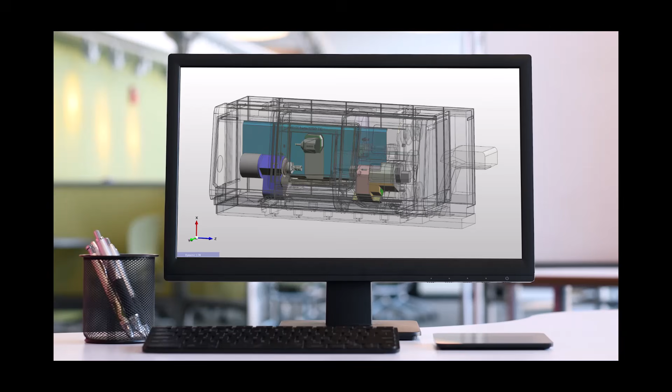We'll be looking at a part in a horizontal type multitasking machining center, and then we'll switch over to mills, where we start with a vertical machining center and then move to a horizontal type machining center.

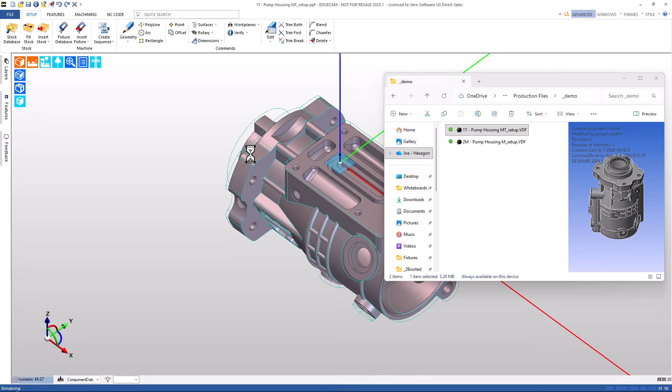So I'll begin by taking a fuel pump and bringing this into my Edgecam session. I'm going to change the environment to turning, and then I'm going to change the part orientation first by flipping it and then choosing the large flat to be our 0-degree position.

We're working with a casting. There's already been some work to turn the back side in a previous machining operation, and I'm going to go pick up from here and move to turning.

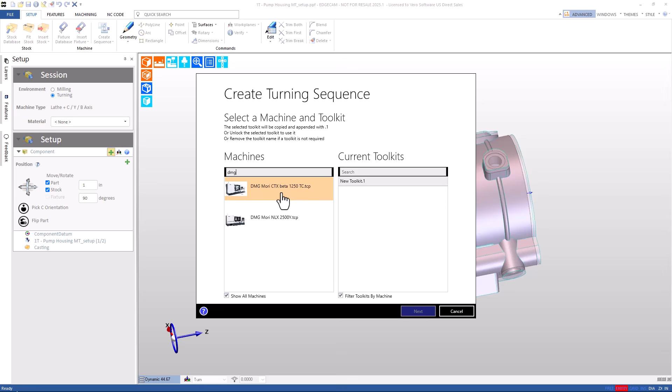So I'll choose my machine tool, my toolkit. We'll work on the main spindle. We'll put in our part stick out, select our initial datum, and then put the grip diameter for the jaws.

Very fast, very straightforward. Edgecam's created the machining setup, and this looks exactly like we intend for the shop floor. Great. We would be ready to move on to create toolpath.

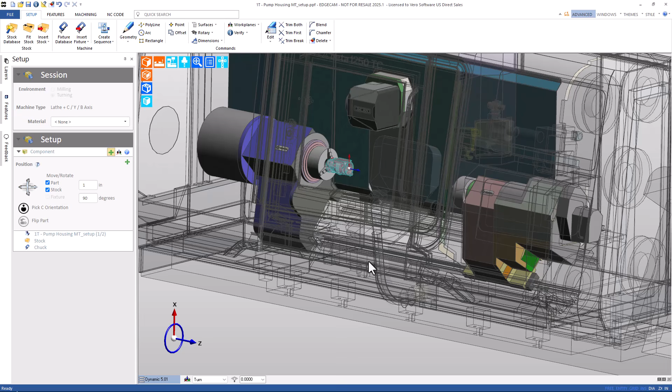Let's dump the file, and now we'll go look at a milling setup. So I'm going to use the same fuel pump, but now there's fixtures added to the solid for our milling setups.

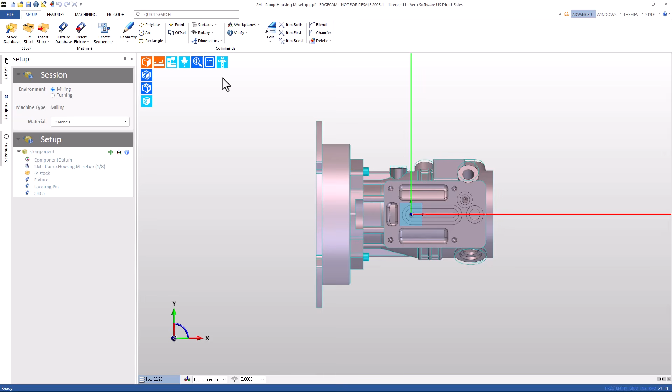We'll load this into the new Edgecam session, and when I look in through the top view, we can see that the part is not oriented the way it needs to be to begin the setup that we're going to do. No problem, we'll easily change the part orientation.

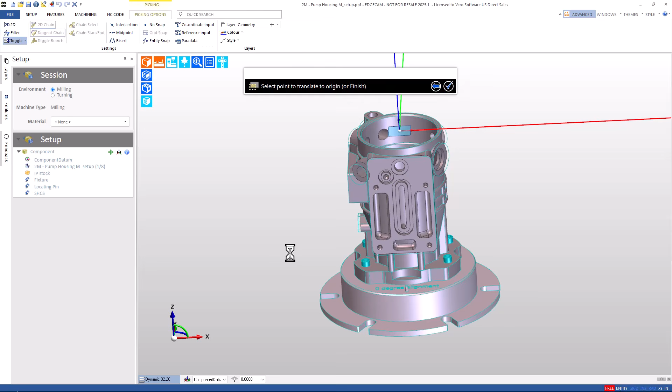I'll choose the face to point up to the Z-axis. I'll choose an edge to clock into X, and then choose the center of the bore to be the datum for the initial 0 point of our machining setup. And so this is how everything needs to be laid in the machine at the go or 0-degree position.

I'm going to save the part here because we're going to come back and reference this. And now I'll continue creating the sequence.

Very typical process. Choose the machine, I'll choose the optional toolkit, and I'll use the default initial datum and leave the automatic machining assembly in place.

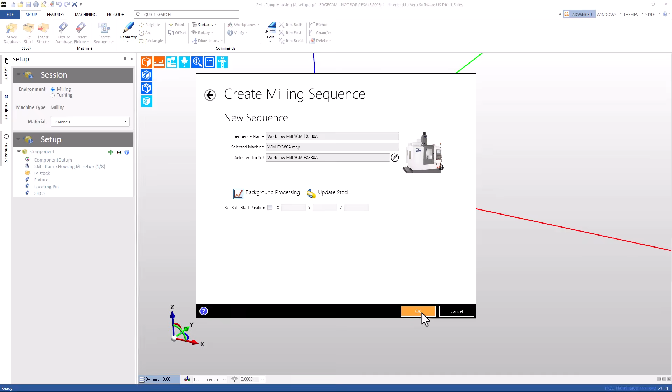After selecting OK, let's look at the results. They're exactly what I expected. The part is sitting on the machine table. The top view looks down at the workpiece. The front view from the operator perspective looks good. This is what I expect.

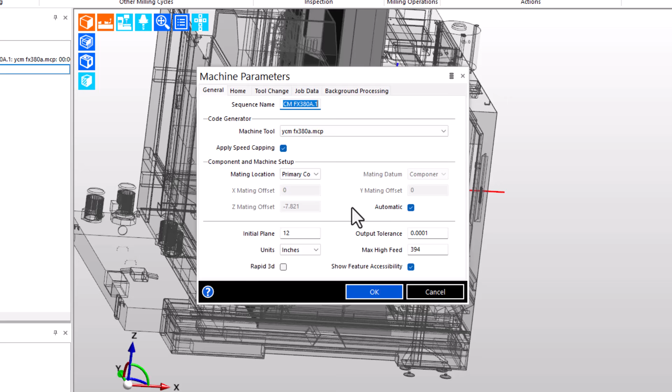We appreciate that Edgecam's automatic setup technology is able to figure out how far below the bottom of the part the machine needs to be placed, and that if necessary, we can turn off automatic and put in our own preferences. But I didn't need to do that.

Great. Well, let's dump the file rather than continue to toolpath, and let's look at it from the perspective of a horizontal machine. So I'll reload the same part and then make the sequence. I'll choose my horizontal machine tool.

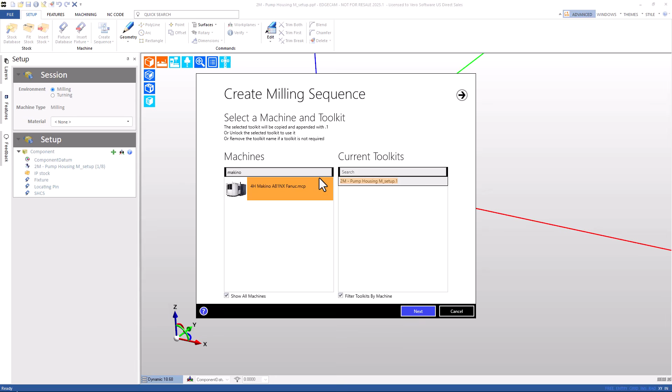I'm going to skip the optional toolkit for this one, but then I'll leave the second page with the default suggestions of initial datum and automatic assembly to the machine. And after pressing OK, we'll look at the results.

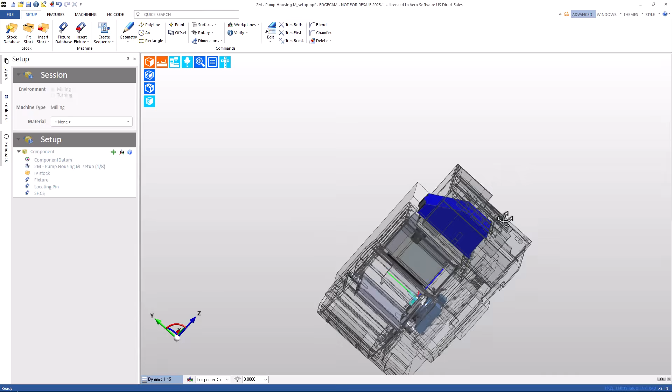They're not going to be what we really need. When we look in from a top view, we're looking through the spindle of the machine, and the front view looks from negative Y toward positive Y. That's all normal, and that's expected, but the part's orientation is not what we expected.

While this may not be what we wanted, stay with me. I'm going to show some important concepts, and then I'm going to show how to get what we wanted.

Edgecam's virtual cam setup is so fast, and it saves a lot of time for milling and turning setups. And the setup window is an important part of that. But here I'd like to move a little bit deeper into some ideas for views and workplanes that might be helpful as well.

So if we start by thinking about having a group of cameras out at our shop floor and having monitors that we use to look through those, we would have a bank of cameras, and the top camera would look from the ceiling toward the floor. The front camera would look from the operator out horizontally, and we have left and right and so on.

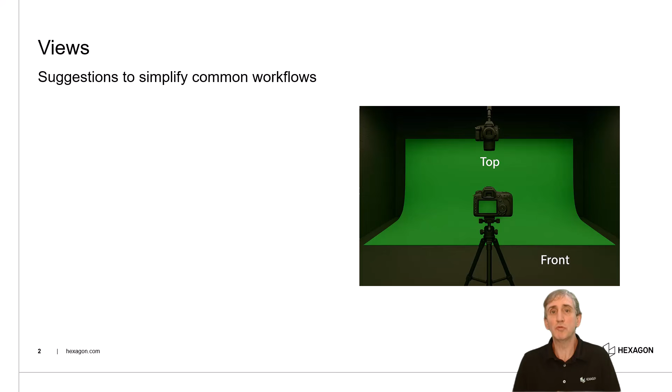Well, now let's imagine a green room. And for sake of this discussion, we'll just have two cameras in it. We'll have the top camera in the ceiling looking to the floor and the front camera looking horizontally. And into this room, we will bring some machining centers.

Now, when I go to bring a milling center into the room, let's say it's a vertical machining center, the top camera will look down the z-axis of that vertical machining center. And Edgecam's top view is related to the top work plane. It looks down the z-axis of the top work plane.

The front view looks from the y negative toward the y positive, just like an operator standing in front of a vertical machining center, looking from the y-axis negative toward the y-axis positive.

Well, what if we brought a horizontal machining center in? The top camera still looks ceiling to floor, and now we're looking basically down the y-axis of that machine because the machine's taken Z and tilted it. The front camera is probably looking through the machine's spindle now.

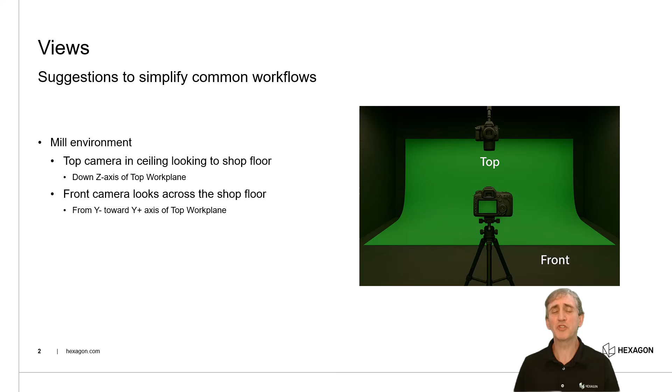And this relates to work planes. We'll get to that in a moment. Well, there are views in Edgecam, and I know that some users may know some other ways to do things, and those are all good.

What we're presenting here are some simple suggestions to help provide some uniformity across how users put together their setups. So if we think about these as cameras, the top camera looks ceiling to floor, and the front camera looks horizontally across the floor, referenced from top.

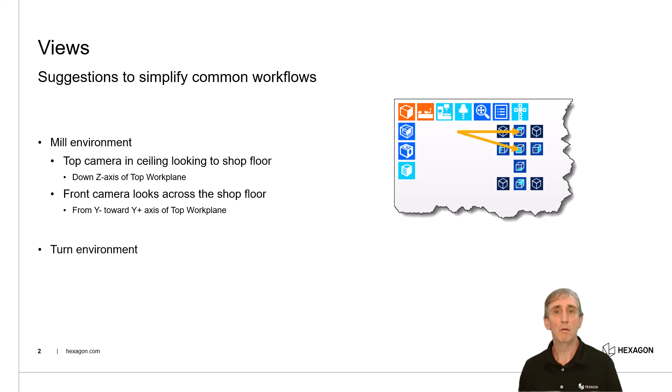There are also cameras for turn. If I'm in a turning environment, we have the turn camera that's perfect for a horizontal turning center where the Z-axis goes horizontally. But we also have a VTL that moves Z vertically. And then we have the axial camera that looks toward the part face.

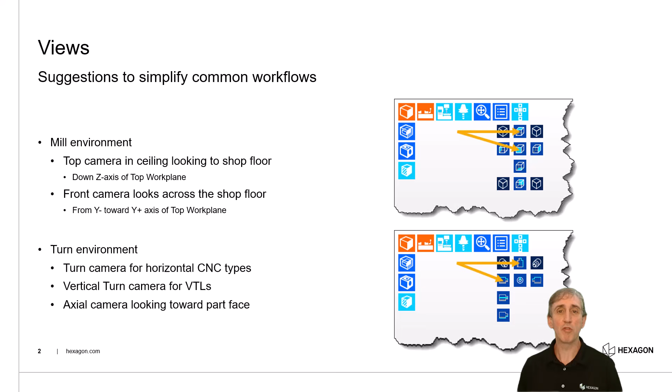Now that we've thought about the idea of cameras, let's look at how work planes fall into play. When you bring in a new file, you get some work planes for free - top, front, left, right, etc. And those all match up to the standard work planes.

My recommendation is that for users working on a new setup for a vertical machining center, your initial datum should probably be based on top, simply because that means your top view looks ceiling to floor. But if you're in a horizontal machining center, consider having an initial datum that is the front or something similar, so that again, your top camera looks ceiling to floor.

Your camera perspective is always correct. I know there's other ways to do it, but this suggestion has been a lifesaver for a lot of users moving from simple toward more intermediate and advanced setups.

When it comes to turning, typically the turn or a turn-based work plane is fine whether it's a horizontal or a VTL, but we also have the axial work plane, which is very helpful for face-mounted live tooling. These are all work planes we get for free.

When it comes to creating the virtual cam setup, what do we do with this? Keep in mind that when you bring in a solid model, you get a work plane called component datum for free for every solid body. That's great - it's a local work plane to that solid.

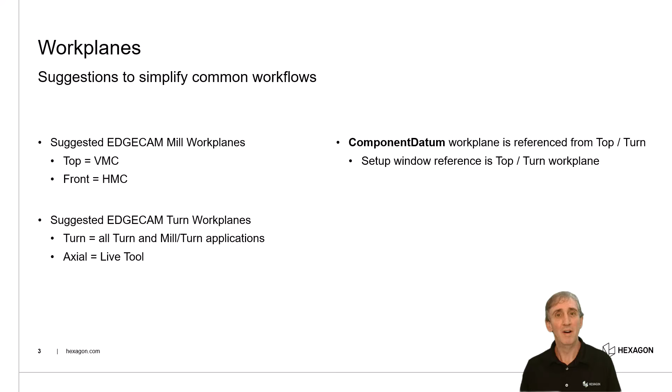If we use the setup window, we can move the part in relationship or rotate in relationship, or we can set a work coordinate system in relationship referenced from the top. So the setup window is always related to the top if it's mill, or turn if it's lathe.

Well, what if we're trying to do something different? We have a command called align component that's been in Edgecam for a long time. It predates the setup window, and it used to be the easiest way to do things. We'll include a couple links to some videos about this command. This is a really useful command to know, in part because it's referenced from the active work plane, not just top or turn.

So now that you know some of these inside secrets because you watched the video, let's go look at how we can use them in a real-world part.

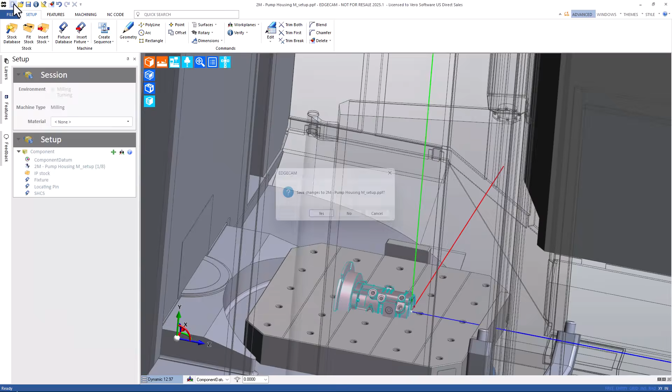Let's show how to build this setup properly. I'm going to dump the file and then open the one that was saved with the part in the correct orientation. But I'm going to go make a work plane. In this work plane, I'm going to make it with the same X, Y, Z directions, but a different origin. And I'm also going to take advantage of the special mating location type.

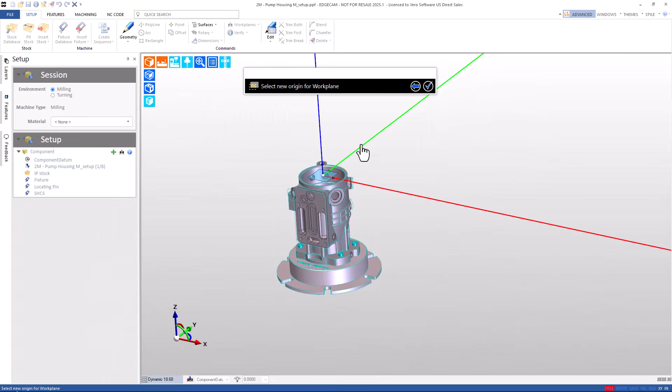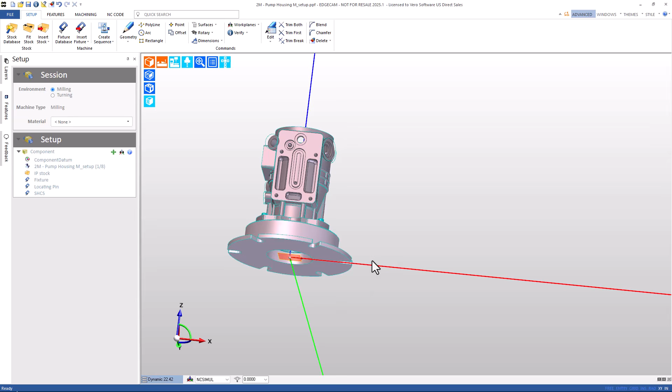The origin is going to have the Z-axis at the base of the fixture, but X, Y at the same position. We can confirm that the bottom face is Z0 in this work plane, and the round hub has a center of X0, Y0. If you look closely, you'll see a different coloring scheme used for this work plane - we see that orangish color when compared to the top, which is a default type work plane with the blue color. So the color there is significant.

The top view shows us exactly what we want. The front view, exactly what we want - just reminders of the camera idea we discussed earlier. And so then let's go build the sequence.

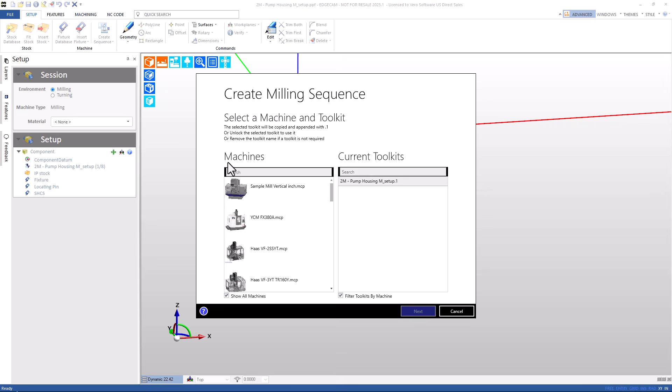As before, we'll pick the machine tool. I'm going to skip the optional toolkit. But on the second page, I'm going to do some different things. I'm going to choose the initial datum as a front datum.

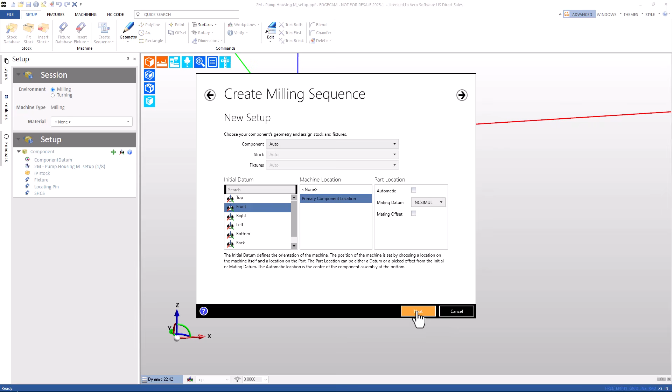So the machine is going to begin in the front work plane. And instead of automatic, I'm going to say, put the machine's mating location to the work plane that I just made - put them both on top of each other, with 0 offset between them. When we look at the result, we see that the top view looks ceiling to floor.

If we had a camera in our ceiling looking toward the shop floor, that's what it would see. The front view stands on the floor, looks ahead, in this case, through the machine's spindle. And the part is set up on the table exactly as we need for this setup in the 0-degree position.

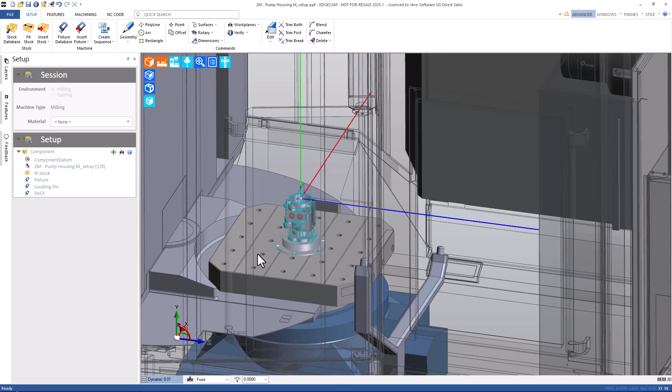When we go to the sequence and edit it, we can see that here, the mating location, which is defined in the post processor, is assembled to the work plane we created at 0 offsets.

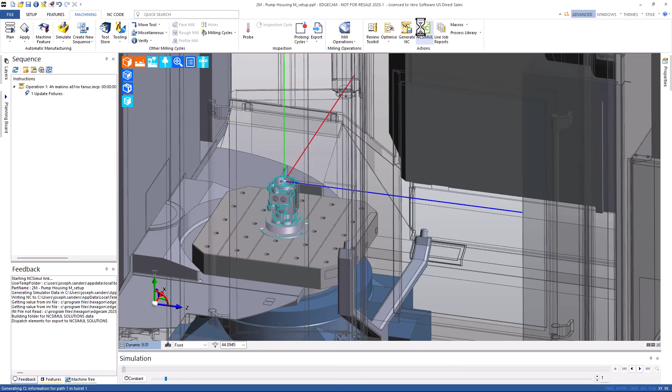There is another benefit to creating work planes at the base of our fixtures, and that is for passing CAM data to G-code verification. When I use the NCSIMUL plugin, there's an input for NCSIMUL 0 setup, and I'm going to choose a work plane from the CAM file, and this ensures that when the CAM data is passed to NCSIMUL, there is no ambiguity about where the part lands on the CNC machine.